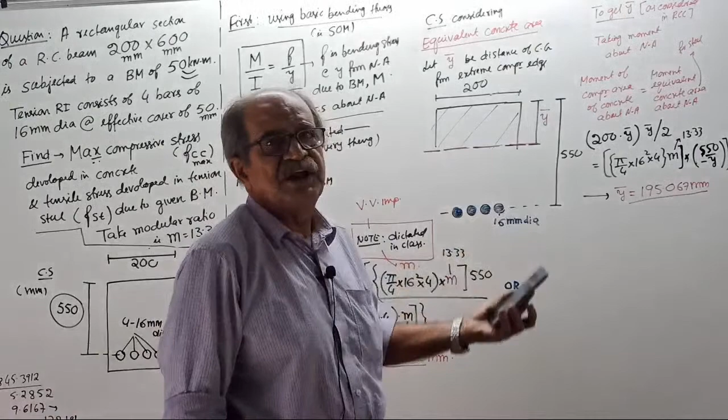But remember, this question is completely basic concept oriented. Once this question is over, I am again starting bending shear stress in a systematic way, where this RCC will not come. Therefore, today also, right now one small problem.

Somebody is digging a bore well there, but actually far off place, no problem. Once in a while that sound will come, discharging sound, that's okay. But if it rains suddenly, and if any problem comes, I will not write on the board, shout like that. I will bring it to a stage and stop.

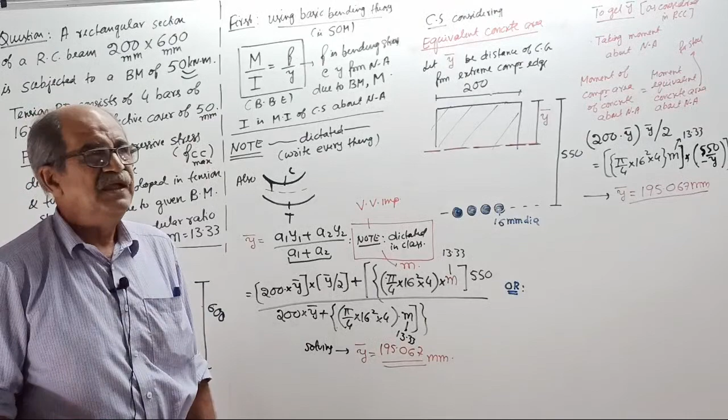Okay, now what they want in the question is, when this bending takes place here, due to this bending, see, due to this bending, upper side is going to get compression, lower side is in tension.

Concrete at the topmost fiber, because of sagging, will get maximum compressive stress. That symbol I will put, FCC maximum - stress in concrete in compression maximum. I read somewhere, I read once again.

Maybe last time I interchanged it. Stress, F stands for stress. I am not using sigma because in RCC working stress method, sigma stands for permissible stress. Okay, here today we don't know any property of concrete, no property of steel.

First of all, it is not known which steel is used, which concrete is used. Indirect hint is there - that you don't bother, it is a strength of materials question. Now, in strength of materials, bending for a member of composite section - remember, but unknowingly, RCC.

Find maximum compressive stress developed in concrete and tensile stress developed in tension steel. That is, stress in steel in tension due to given bending moment. Take modular ratio 13.33 - remember, regarding modular ratio, I told last time.

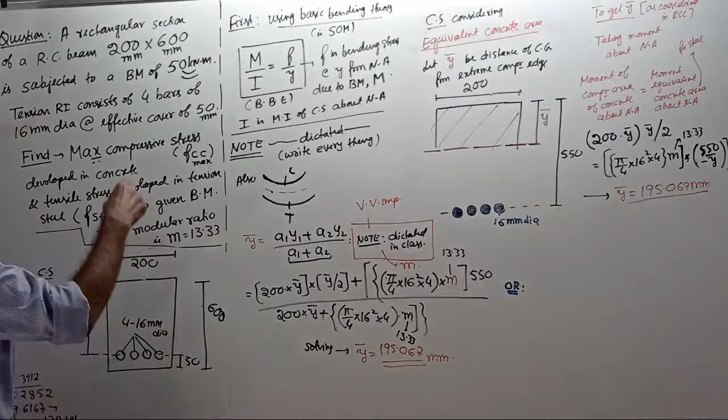I forgot that width is 200. Somebody can question: 4 of 16 if you place here, 80, 120 gone. 1, 2, 3, 4, 5. 120 by 5 is 20.

Around clearance of 25 mm comes in between. Okay, adjustment. Actually I forgot that. I would have taken only 3 bars. Width is 200. Later, today when I was writing the sketch, I realized in width of 200, 4 of 16 mm bar is difficult to place.

Okay, no problem, this is not an RCC class. If anybody questions that way, I will answer in the RCC class, or I will place it. Maybe it may not satisfy some requirement. No problem. Today we will find the stress and dismantle the beam.

And what will we do? We will dismantle this beam. We will completely take out this beam and break it. Okay, now they told effective cover 50 means from tension edge to center of steel, that is 50.

So from the extreme compression edge, top edge here, to center of steel is 600 minus 50, equals 550, which is not given. Instead it is calculated. You should know that. It is not given, it is a calculated value. I rounded it off. Over, start.

Now you forget about RCC. Come to basic bending theory. That is, you are in strength of materials. You do not know anything about RCC. Neither you know nor I know.

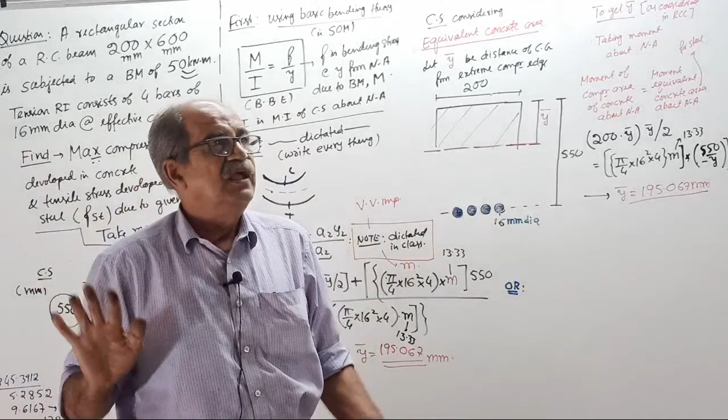Okay, I will do one thing now. From here, I will remove full RCC. One minute now. Before I remove it, I should tell one thing. You write here, in the question only, write:

Tension, concrete in tension zone is to be, what, tell me? You write in the question. What extra data or extra information is right there, please or kindly. Concrete in tension zone is to be, tell what? I forgot to write it here. It is to be neglected or ignored. Someone will say he has not told it, but I am telling here: you write in the question, ignore the concrete in tension zone. Over.

So where tension comes, we have only steel. Concrete is removed, it is not there. Right, now note, this is already told.

Now I want the cross section. Remember, those who want, write it. In strength of materials, I told you, when you write the cross section, see, upper side is in compression, lower side tension. Tension is taken only by steel. So if the neutral axis comes somewhere here, see, I have written here, you know neutral axis passes through CG of the cross section. So let y bar be distance of CG from extreme compression edge.

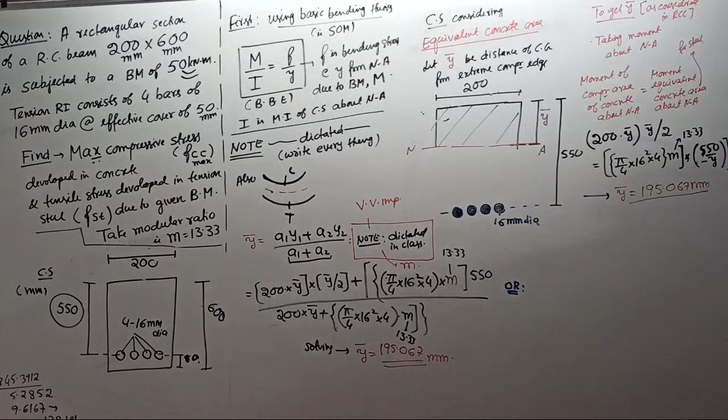Now below, complete empty, nothing is there. Oh sorry, I removed that axis only. Okay, neutral axis. And I'll change the red color pen for a little darker one. So that, okay, now okay.

Below, you have 4 steel bars of 16 mm diameter. Anybody talking about covers and all, keep quiet, I will tell. Someone told this way, okay. You imagine somebody told he is placing 4 of 16 in the width. Why should you bother? This is not RCC class.

Actually I should have given 3 bars, or some 3 of 20 mm diameter, or 2 of 25. By chance I put 4 now. I thought width is quite more. Then I thought I had taken around 230 or 300, but I took only 200. Okay, no problem, here nothing is there.

So below, from the top edge, at exactly 550 millimeter, we have 4 bars of 16 mm diameter. I wrote it in blue color, remember blue color is steel. Now this is the cross section, right here.

Cross section considering equivalent concrete area. This is really concrete, see, this is really concrete. This is not concrete, that is steel. Therefore you should not forget, what, tell me, should not forget.

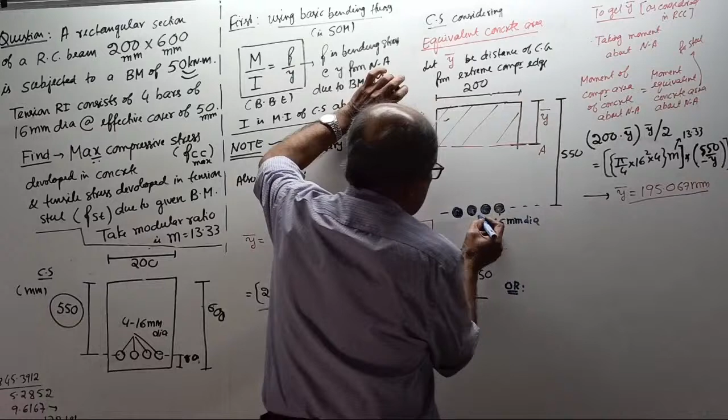Make a note, I write here, you should make a note: should not forget that this is to be converted to equivalent concrete area by multiplying the area by... I am removing it... by multiplying the area by, tell what?

To convert this steel into equivalent concrete, you have to multiply the area by modular ratio M. Write this down, I will explain everything to make it easy to understand.

See, in India we take rupees, America takes dollars. Imagine $1 equals 75 rupees. Suppose I have $2 and some 100 rupees, I cannot say the money is 102. What I will say is 100 rupees plus $2 multiplied by 75, that is the conversion factor. It becomes 150 rupees plus 100, so 250 rupees.

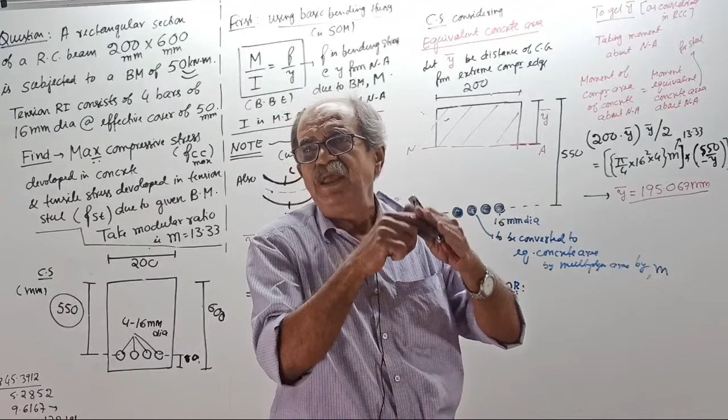250 rupees is the equivalent money in rupees. Or I can do it the other way: take $2 plus 100 rupees divided by 75, because I am converting rupee to dollar. Rupee being of lesser value, when converting rupee to dollar you have to divide.

See, steel is stronger, so multiply by M and it will change over to concrete, only in imagination. Steel will remain steel only. Nobody will actually go change the steel to concrete.

Now note down, write everything I tell here, including the dollar-rupee example. Now, when you take the cross section, on the compression side write concrete, on the tension side show steel, but with a warning: it is to be converted to equivalent concrete. Then only you can do the calculation. Now I want to locate the neutral axis.

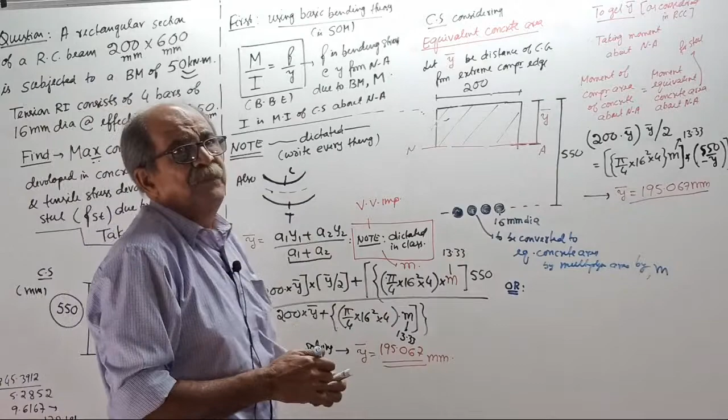In strength of materials or engineering mechanics, we take moment about the top edge, then the formula A1y1 plus A2y2 divided by total area. But remember, when you find y bar, the area of steel should be converted to equivalent concrete. Start: area of compression is 200 into y bar, with center of gravity from here at y bar by 2, plus pi by 4 of 16 square, one circle, into 4, for all 4 bar area.

This is the steel area, multiplied by modular ratio 13.33 to convert to concrete, with distance from CG to top edge being 550, divided by that area 200 into y bar plus this equivalent area pi by 4 16 square into 4 into m. Y bar comes out to 195.067 millimeter, which we got from the photo of last time. I noted this down to save time.

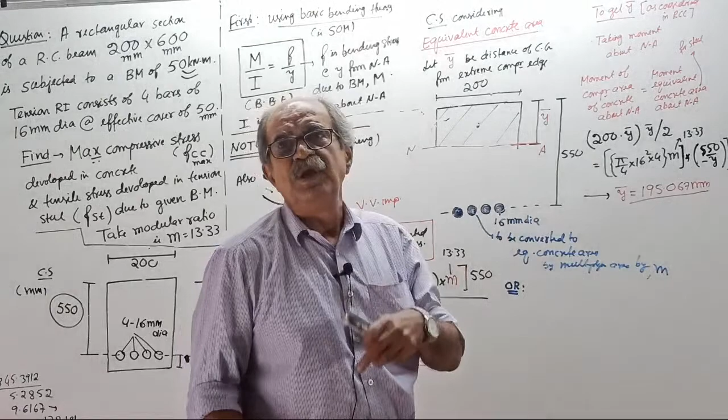This is the y bar you got. Now make a note: actually in RCC we don't find y bar that way. In RCC, instead of taking moment about a reference edge, we take moment about the neutral axis. Then moment of compression area about neutral axis equals moment of equivalent tension area about neutral axis. So 200 into y bar by 2 for compression area moment equals this area into modular ratio m into, from here to here, 550 minus y bar. Equate these and you get the same y bar.

Tell me, did we get the same answer last time? Yes or no? What I wrote here, is it all tallying? Yes, okay.

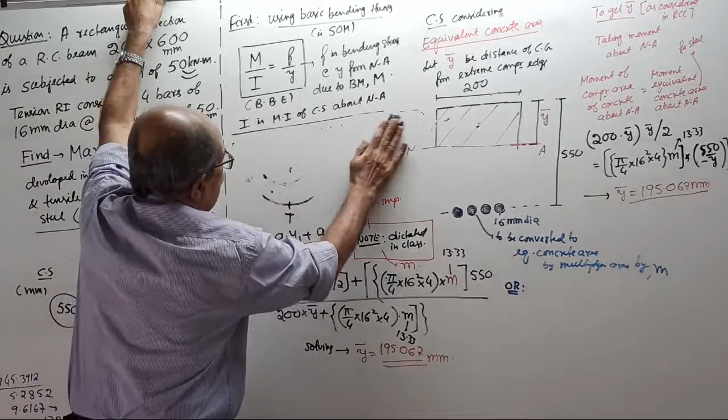Now that is clear. Now I will remove all these, I want space here. This will still remain, but I will remove this and just note compression at the top, tension at the bottom, because there's no space. I will remove A bar, A1 bar, A2 bar, etc., not required, the section will still be there. I should put a border line here, I should not go beyond this line, I will remember, a little to this side better, beyond this line.

Now, M by I equals F by Y. I will explain once again: F is the bending stress at Y from the neutral axis due to bending moment M. I is the moment of inertia of the cross section about the neutral axis. Therefore, now you require the moment of inertia of the cross section about the neutral axis.

This was where I wrote on the board where even I myself could not hear my voice. I tried for some time, my mouth was moving, then I decided to stop. Yes or no? Up to here was thoroughly told last time, then the class stopped.

Now, when you do moment of inertia, some ink spreading is there. Remember, we are solving based on equivalent concrete area. So in terms of equivalent concrete area, that is what we want.

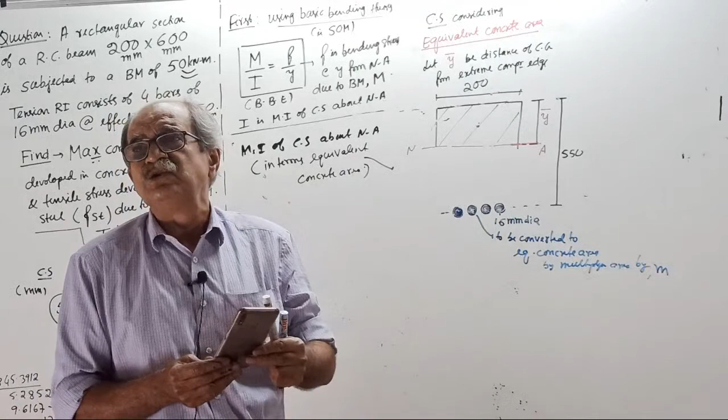So even for moment of inertia, the conversion factor is m. For steel, the conversion factor is m, the modular ratio. Because moment of inertia is area into distance square, and distance I am not changing, area into m time means... so m. I about neutral axis for equivalent concrete area equals...

See here, use the parallel axis theorem. One more thing, in this class I am not wasting time explaining parallel axis theorem.

People who study these things and want to gain more knowledge should at least know what parallel axis theorem is. If anybody tells me they don't know parallel axis theorem, I will ask why you are coming here. Without knowing parallel axis theorem there is no point. But I will not ask in class whether you really know the meaning of moment of inertia.

Newcomers will say yes sir, yes. Those who already know me will say we don't know, even though they know very much. Why do they say that? Because I will start telling something else then. I will say, look at a beam, I can see moment of inertia.

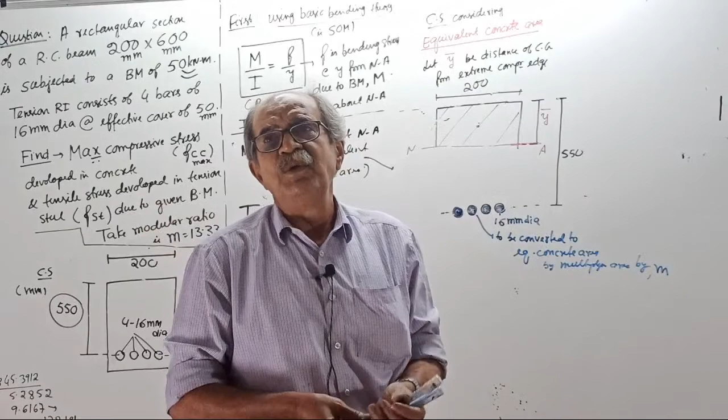Some people say we heard of it, they are very good actually, still they don't want to commit. Why? They know that if they say we know, the teacher will think about what to ask next time, therefore better escape by saying we don't know.

Leave it now. Newcomers will say we know. After 3-4 classes in colleges I have seen, first class you know everything, SFBM, yes sir. After 4 classes, SFBM, no sir. Why? Because that was before we knew you. Now we know what you are, so now we don't know.

Okay, start, I will briefly explain. I about any axis equals Ig plus A H square. That also I should not need to tell. Start. First, moment of inertia about its own centroidal axis.

That is 200, I will put blue color, into this Y bar, you enter now, 550, go that side. Why? Because I want to enter here. This is 550, Y bar equals, any answer, red color. There is red color, hello, it's Y bar. Oh luckily I noted it down.

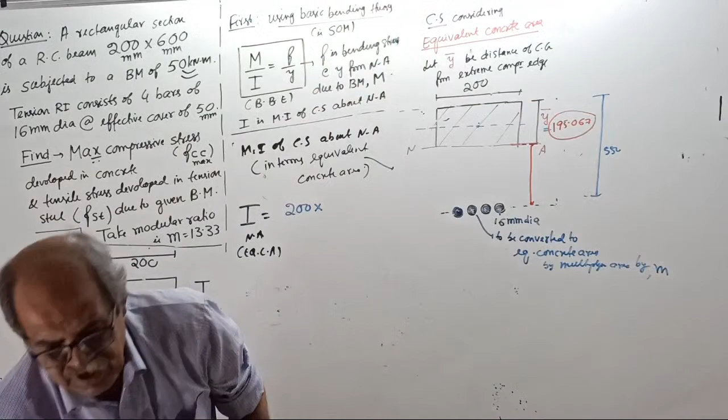These are entered values, not given, that will come. I won't ask you because it takes a lot of time. 550 minus 195.067 is 354.933 millimeter. Now, start.

I want moment of inertia about this neutral axis, that is, see this axis. Start, using parallel axis theorem. First, I about its own centroidal axis parallel to neutral axis. 200 into this distance, okay suddenly black color, no problem, 195.067 cube divided by 12.

I think I should remove all this. This is Ig, this is Ig. Then plus area. What is the area? 200 into 195.067 is the area, into from CG of this one to neutral axis, this distance square, 195.067 divided by 2, whole square.

BB is asking me why you are coming into the tension zone, I am rubbing it out. This is for concrete. Or if you know a little more principle, moment of inertia of a rectangle about the base is directly BD cube by 3. If you know it you can use it, but I don't use it.

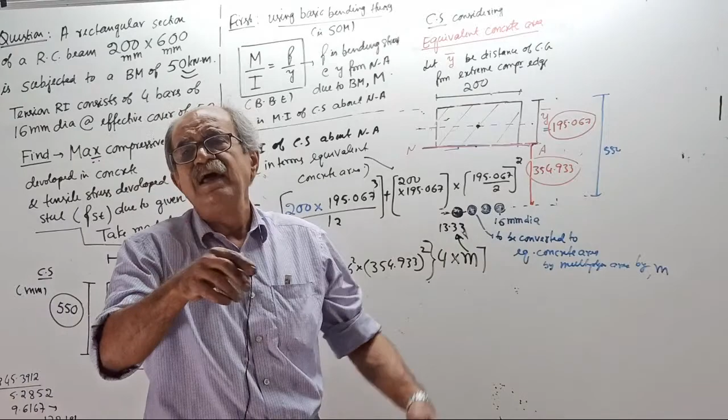But actually, when you calculate this number, you can skip it. Why? Because you can take I equal to directly area into distance square, provided dispersion is too much more, and self moment of inertia is too small. If this comes in crores, say 1 crore, 2 crore, 3 crore rupees, then this self moment of inertia may be just 20 rupees, 30 rupees. People will tell, leave it.

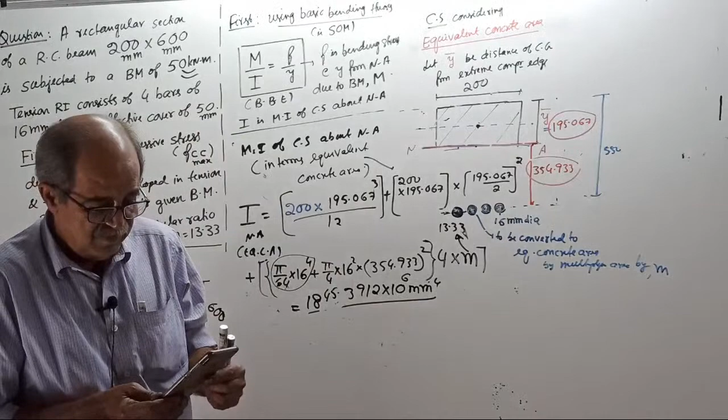Last time I gave the answer 1845.3912. Someone told it's not tallying. Later, someone told it's tallying, then the other also agreed. Yes or no? This was told last time. Correct now? Just tell the answer. Was it correct? I noted down somewhere here. It is 1845, not... tell me, correct or not? No, I want confirmation. Is the same answer given last time? I wrote somewhere: 1845.3912. Yes, okay. Now, start.

I over. Now see, I'll remove all this one now. I'll come here, this 550 I will remove, and I will draw the stress distribution diagram. Remember, sagging bending: if I continue neutral axis with red color, if I continue the neutral axis here, see correctly. If I draw the stress distribution diagram across the cross section, upper side compression, lower side tension. This is maximum compressive stress in concrete.

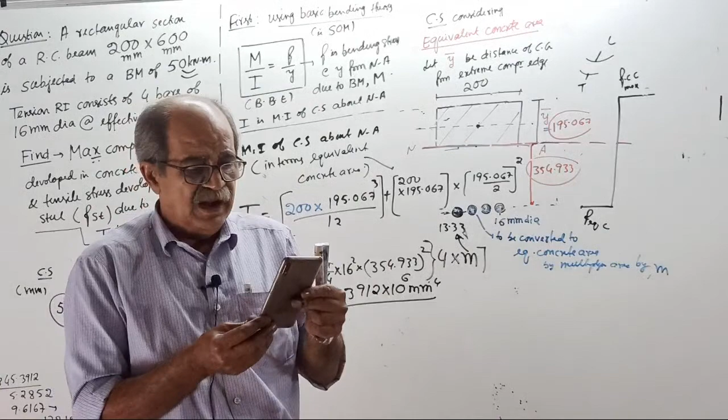I wrote what? Maximum stress in compression in concrete. Here, this is stress in what? Equivalent concrete. Stress for equivalent concrete in what? Tell me, in what? Not in compression, in what? First of all, imagination. Stress for equivalent concrete in what material? Stress for equivalent concrete in tension. This is not steel stress because this steel is already converted to concrete.

So then joined by a straight line. That is what theory? Compression tension. Okay, now start, now very easily you get the answer. All these I can remove, because we are about to close the question now. Not much, 184, I'll forget now. Okay.

You don't know how. See, this clearly shows what memory power I have got. I am very weak in byhearting things. Okay, start now.

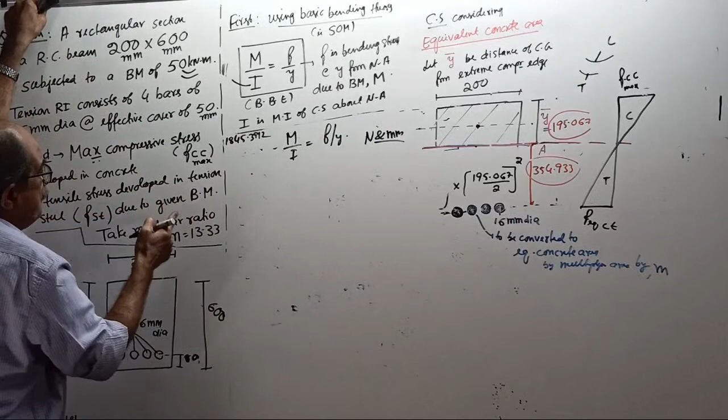Now, come back once again. M by I equal to F by Y. Start. First, M. Where is M? M: substitute everything in Newtons and millimeters. Start. Bending moment M is told 50 kilonewton meter, equal to 50 into 10 to the power 6 in Newton millimeter. If this is not clear, better log out and leave the class right now.

Divide by I. I equal to what? I equal to, where is I like that? 1845.3912 into 10 to the power 6 equal to, see, M by I equal to F. Go to the topmost fiber. Maximum compressive stress in concrete divided by, tell me, corresponding Y. For that fiber, Y from neutral axis. How much answer? What is the Y for top fiber?

Y for top fiber, fast. Reply a little fast, don't waste time. Y for top fiber. This lag I should remove somehow. If the lag is removed, the answer comes quickly in Zoom class. 195.067.

195.067. Using this equation, see, first I write here now. First, okay, 1 minute now. First, F max CC. First, F max CC. Okay, then I will come to the other one. I'll change this pen. First, you go for F max CC.

Okay, start. Therefore you get maximum stress in concrete in compression. Answer: tell the answer in Newton per mm square. I want, for some reason, 4 decimal accuracy. Fast answer. I already noted down 5.2852. I got 5.2852.

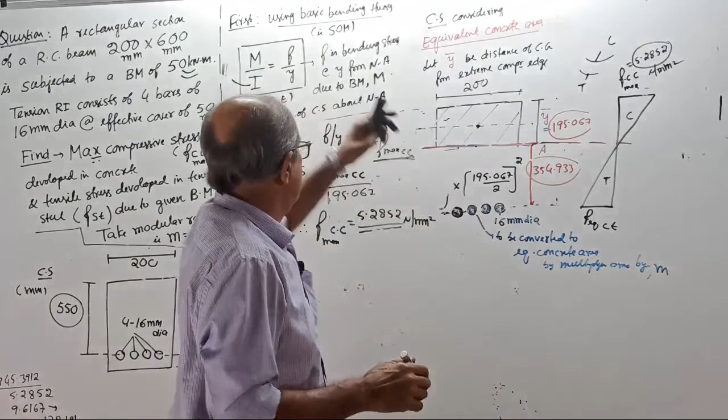Okay, over. Now find F stress for, what is the stress for equivalent concrete in tension? Same formula, M by I equal to F by Y. You write F-EQ-CT, then divide by, tell me, corresponding Y. Divide by corresponding Y, how much I have to write? Corresponding Y, what is corresponding Y? Corresponding Y, I am a little weak in mathematics.

354.933. Divided by 354.933, therefore you get stress for equivalent concrete area in tension. That is, at this level, if instead of steel it is concrete, what is the stress? How much answer? I got 9.6167. Is the answer correct? 9.6167 Newton per mm square is the answer. Is that answer correct?

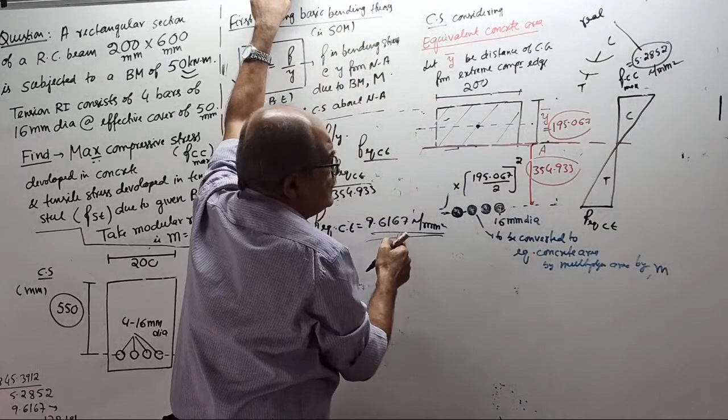Note this. This is stress for imaginary concrete. Actually...

Tension resisted by what? Tell me. Tension resisted by what? Actually, tension is resisted by steel.

Therefore, if this is the stress for imaginary concrete, will steel have more stress or lesser stress? Think a little.

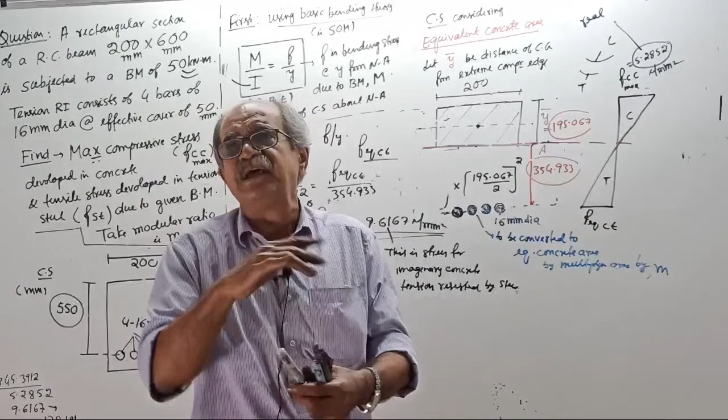I am not discussing this further because this class is an analysis for RCC, not for modular ratio in general. If I keep explaining that way, there will be no end—you study that in strength of materials. It will be more. So, what stress, tell me?

Therefore, tensile stress in tension steel actually equals whatever stress we got for equivalent concrete in tension, multiplied by modular ratio M, 13.33. Tell the answer. Why? Because if concrete is taking that much stress, concrete area is magnified area, and steel area is contracted. So for the magnified area, if stress equals...

9.6167, when you contract that area, stress will increase proportionally by M. Answer, I got...

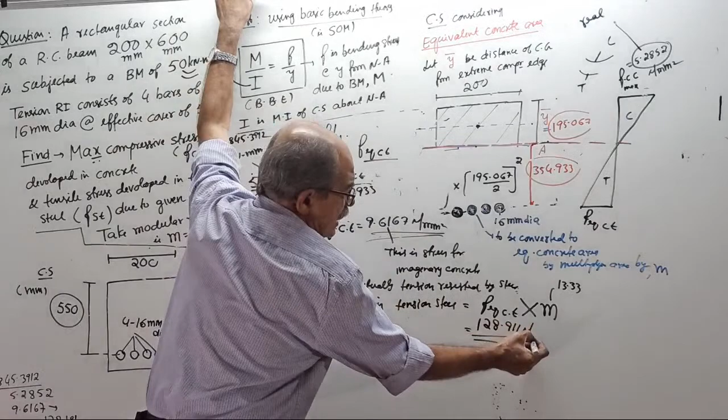128.911 Newton per mm square. Correct? 128.911 Newton per mm square. Correct answer?

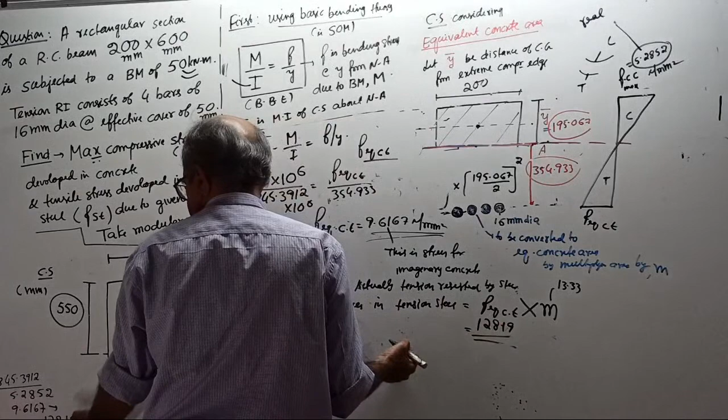1906 done. Now, one important note—I am leaving this, leaving strength of materials, with the final conclusion. See, I will remove this one now.

I want the answer now. See correctly, if you want, enter the answer. Don't enter here—why not? Because if you enter, it is imagination. Okay, leave it now. Now I will remove this one and write a note on the result.

Therefore, by basic bending equation or basic bending theory, that is M by I equal to F by Y, or sigma by Y—as per strength of materials concept, we got maximum compressive stress in concrete equal to how much?

9.6167 Newton per mm square, and we got tensile stress in steel—tensile stress in tension steel, no symbol—equal to 128.1906 Newton per mm square.

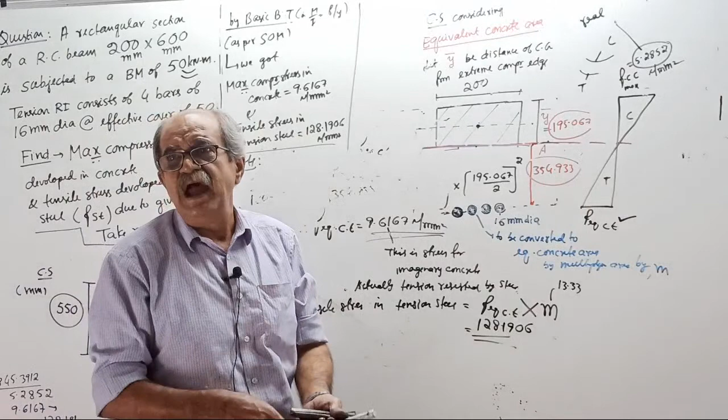Or you can write a note here. Those who are interested should write this note. My question comes now—I told people who want a brain teaser or brainstorming question, someone asked earlier. Now answer it.

See, here, is moment of inertia considered or not considered in this equation? My question is, moment of inertia is considered or not considered? I want the answer now. Moment of inertia is considered.

Right, I will ask my brain teaser a little later. Wait for the brain teaser answer. This all I will remove now.

Now the answer came, you remove it all now—none of them required. Actually, the question is solved, solved by strength of materials.

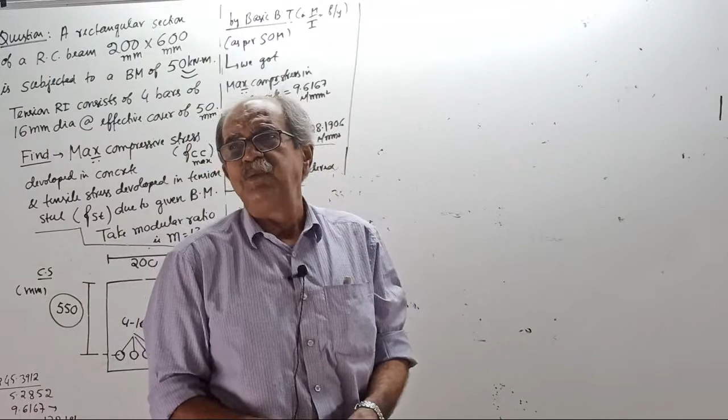Actually, nowhere in this world, I am sure, have I seen people solve RCC bending or stress problems this way. Remember, nowhere I have seen it. Nobody in the world goes for moment of inertia calculation or puts M by I equal to F by Y etc. No—because in RCC, they derive some other equation.

Use that one instead. There, is moment of inertia considered or not considered? Tell the answer. If you use R, now do one thing—close strength of materials, moment of inertia considered there. Okay, go to RCC, I will tell the equation.

Bx square by 2 equals—I am not by-hearting, I can see it there—Bx square by 2 equal to M times AST into d minus x. Equation for neutral axis: M into FCC divided by FST equal to x divided by d minus x. Relation between stresses. Then M equal to b into x into fc by 2 into d minus x by 3, or AST FST into d minus x by 3. None of them by heart.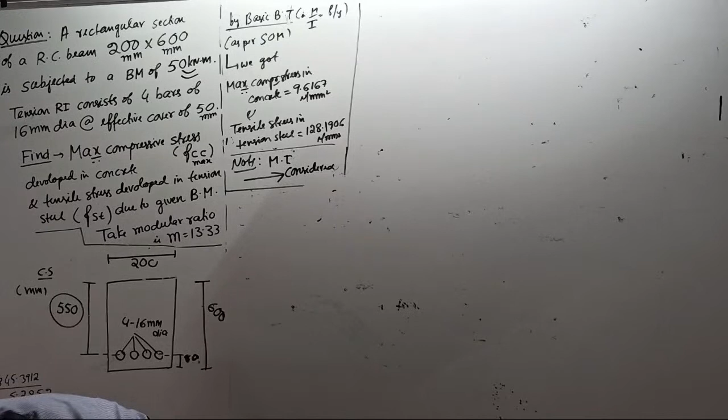I can see everything. Some will say otherwise. There, have you anywhere seen the moment of inertia term there? Tell me. Have you anywhere seen the moment of inertia term in the basic RCC equation? Tell fast—have you anywhere seen moment of inertia term in the basic RCC bending equation?

Fast, I told all the equation now. I will write it also. See, you are not answering.

You know RCC. Have you anywhere seen, did you see anywhere a moment of inertia term there? No? Okay, my question comes at the end of the class.

For all those who want brain teasers, remember, once I start giving brain teasers in the YouTube class, see how many will follow, one after another. Someone, I don't want to tell whom, he told me, sir, time being enough, sir. At present I am not able to digest. Please give some gap. This way of non-stop firing of questions, he told, I am getting completely blown away.

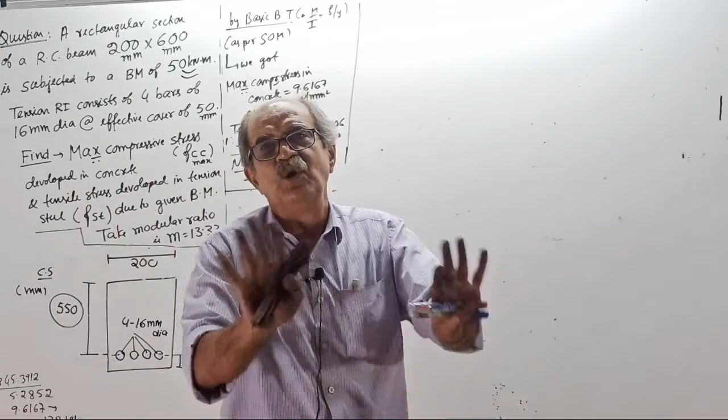He only asked me to ask some questions. I started asking, 3, 4, 5. Answers came, I told wrong. Then I asked, shall I ask the next question? He told, no, let me first try this one, then only I will ask you. So far I never got any message from them. Stopped permanently. Okay, maybe he thought I am not worth it. Reason why, still struggling to give the answer. I don't want to tell, someone good concept was there.

Okay, now start, now come to RCC. See, in RCC what you do is, I will tell briefly about RCC. First of all, my duty is not RCC, I can only give the equation and solve. But still some will tell, oh this person does not know RCC, so he by-hearted and came. So I don't have to prove anything to anybody. I will do one thing.

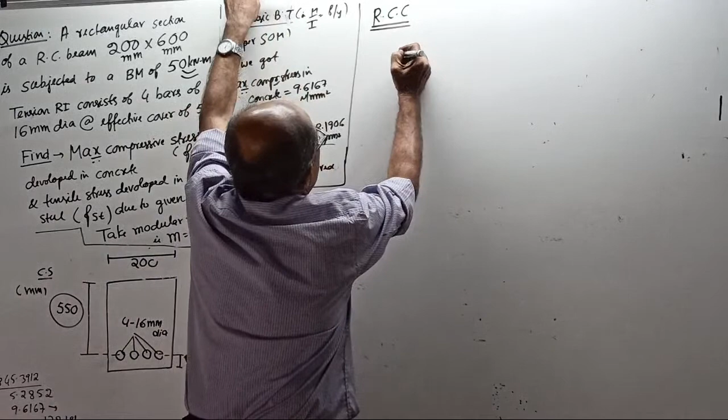Consider a rectangular section of an RC beam. Perfect concept, see width is B. This is the area of steel together, AST, steel. Somewhere here is the neutral axis.

Distance, in SOM you call it Y bar, in RCC we call it X. In working stress method, remember I told you, in limit state method we call it XU. Yes or no? Limit state method we call XU. Yes or no? Heard of it? Working stress X, limit state XU. No answer? At least heard of it or not? One yes, okay, leave it now.

Start. Now, if that is X, this will be D minus X, because the extreme compression edge to the center of steel is called D. Some people will tell D is the distance from the top fiber. No, wrong. D is the distance from the top extreme edge to here if it is a sagging beam, or from bottom to there if it is hogging, or generally you should say it is the distance of the CG of tension steel from the extreme compression edge.

Now this area is in compression, this is the area in tension, this is completely ignored. So if you draw the stress distribution diagram, see, symbol, here I will put maximum stress in concrete, FC, sufficient. Why? Sufficient, I usually use FC. That FC is nothing but your, what? I use the symbol here, what? F maximum CC, not required, simply FC.

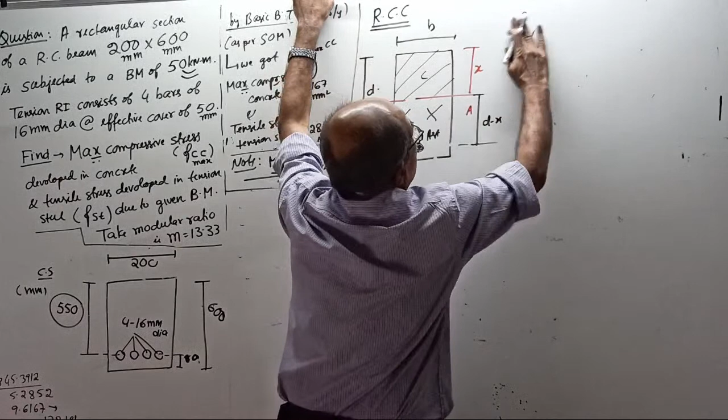Here, FC. Here, stress in steel is FST. So FC is maximum, I'll write here now. FC is maximum compressive stress in concrete. And FST is stress, okay, stress in steel in tension. Now, this is for concrete, this is for steel. No.

Now you cannot use any linear function. What do you have to do? If this is concrete, this also should be converted to equivalent concrete. Stress in steel, we want to change over to concrete. Tell me, if the steel is taking FST stress, for imaginary concrete will it increase or decrease?

Ulta now, reverse. Earlier I told, you know stress in concrete, you multiply to get stress in steel. Now this is stress in steel, I want to get equivalent for concrete. Will it increase or decrease? This whole theory I told in the RCC class for you in the RCC batch. No answer. It will decrease.

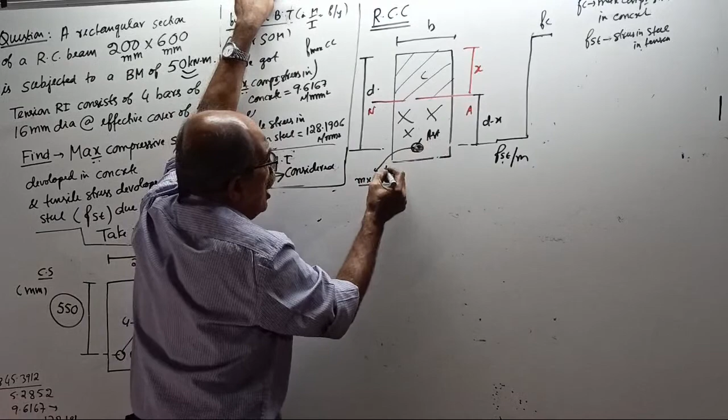So what do you have to do? You have to take FST by M. And this AST, when you change it, it will become M into AST. See, when you convert the steel to concrete, it becomes M into AST, and stress in steel, when you convert to concrete, divide by M.

In RCC, sometimes I tell our students blindly, do one thing: area conversion, multiply; stress conversion, divide. Sir, got it, sir. Why, see the nature of students, see their spirit. Area conversion, multiply, stress conversion, divide.

One small piece of information for you. Recently I am taking some classes, now I observed the level of understanding and basic knowledge has drastically gone down. Earlier it was something studied well, see 2010, 2011, 2012, etc., up to 2020 level. Now you don't know.

Suddenly now, the level is here. It has come down, drastically down. Can anybody tell the reason? They don't know anything. What is the reason?

I know the reason. Earlier, exam fear was there, so you had to study at least something. Now, recently, past 2 years, there's no exam fear. Everybody passes without writing examinations. That is because of COVID-19. That's why some people call it the COVID batch.

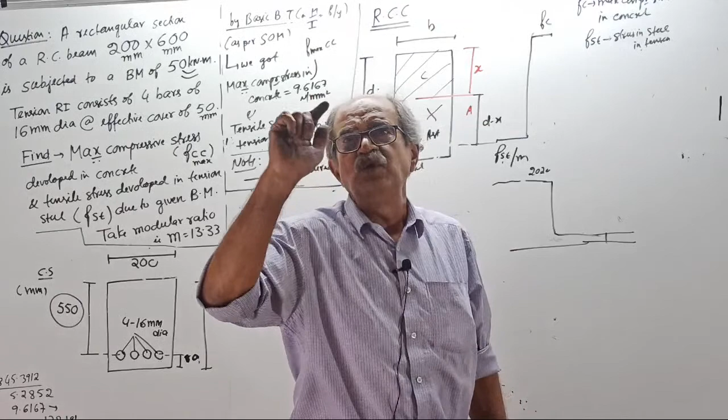I observed it in the subject knowledge. Even earlier there was a limit, I won't say the earlier level was very high. But at least what knowledge they used to have 2-3 years earlier, those who come to me now, 90% of that is removed. Only 10% is there. Very bad.

If you are in the teaching profession, you can make this out. Suppose you have taken a class for 5th semester, after 1st, 2nd, 3rd, 4th semester passed out. When you take 5th semester structural analysis, you will face such difficulty - they will ask, 'fixed beam, sir, what is that?' Earlier they would at least tell WL square by 12, WAB square by L square, or at least tell bending moment. Now they ask, 'bending moment, what is that, sir?' You see how much the standard has gone down.

Okay, leave it now. Now, FST. And as usual, M is modular ratio. Modular ratio, okay. Now, is everything okay?

Okay, I can see here only. Now see, therefore the stress variation is like this. I am telling this is compression and this is tension. Now I will take one by one and solve. First, I want to locate the neutral axis.

Now coming to this question, our example question here - as a RCC problem, tell me the answer for all dimensions. B equal to 200 millimeter, correct? And we got effective depth D equal to 550 millimeter. And area of steel in tension, AST equal to pi by 4 of 16 square multiplied by 4, equal to 804.25 mm square.

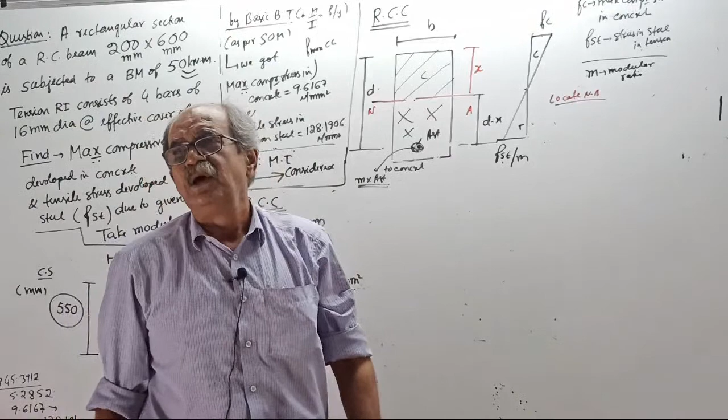Some will say, sir, is this by heart? No. 4 of 16 mm diameter bar, I've used it more than 4,000 times, I know the area. 4 of 20 mm is 1256.64. 5 of 20 is 1570.8. Why? Because when you use it many times, even if you don't want to, the answer comes automatically. 3 of 20 is 942.48. Okay, leave it now, that's enough of that.

Right, AST. And in the question they told M equal to 13.33. Now, as I derive, I will solve.

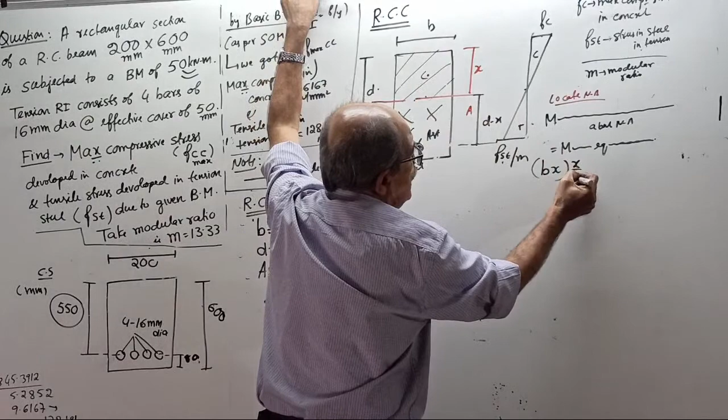To locate the neutral axis, you write moment of compression area about neutral axis equal to moment of equivalent concrete area for the steel bars about neutral axis, or moment of this area equal to moment of that area about neutral axis, with the steel converted to concrete. You get B into X is the area, and its center of gravity is at X by 2, equal to this area AST, but converted to equivalent concrete by multiplying M, and from here to here is D minus X. So you get the equation bx square by 2 equal to M times AST into D minus X, which is the equation to locate the neutral axis.

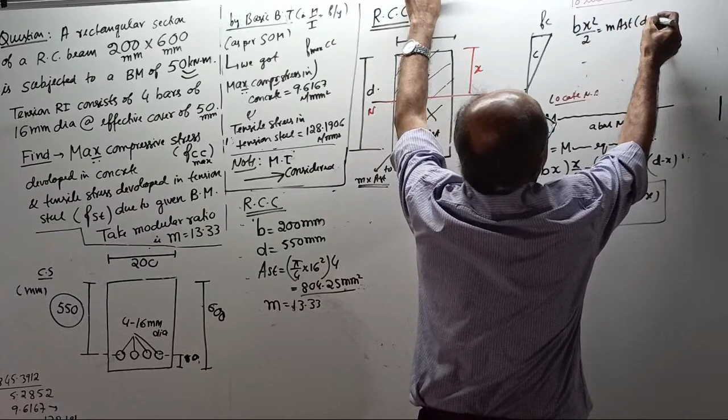Okay, I will write it somewhere so we can apply it later. I'll remove this now. Therefore, to locate the neutral axis, the equation to be used in RCC is: bx square by 2 equal to M times AST into D minus X. This is the equation for the neutral axis in RCC, which I covered in the RCC class for you.

Okay, now further - due to bending, maximum stress comes here in compression. So from similar triangles of the stress distribution diagram across the cross section for the equivalent concrete area, you can write FC divided by X.

Equal to FST by M, or I'll write it another way, easier: FC by FST by M equal to X divided by D minus X. Therefore, if you simplify, you get the relation between stress in concrete and stress in steel, given by M into FC divided by FST. FC is the stress, actually FST by M, with M jumped to the numerator, equal to X divided by D minus X. This is the equation.

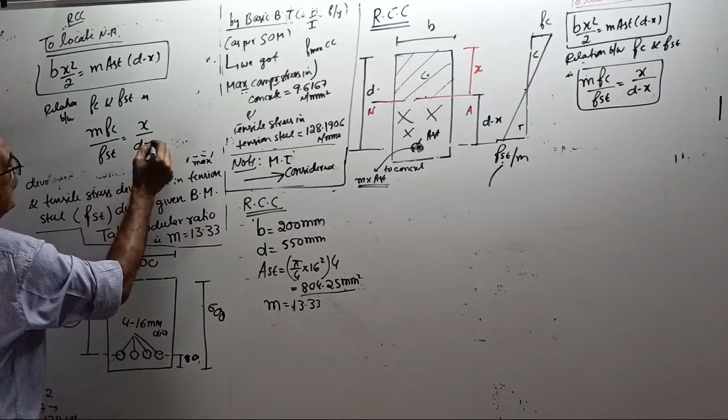Actually, I don't have to derive this, I can just give the equation. But I am deriving it for my brain teaser question, otherwise why should I derive it? Okay, now lastly, I will remove this one.

Now I want the expression for m. Okay, I will remove this one now.

Now this concrete area is in compression, so there is a compressive force like this. That force will be acting, force equal to stress into area. So as the stress varies, the force will vary too, and there will be a resultant force here called C. To the center of tension steel, there is a force equal to T.

This is lever arm A. Now C is the resultant compression force in concrete, in compression, and T is the tensile force in steel.

In general, resisting force equals stress into area if the stress is uniform. Whereas if the stress is not uniform, it is force equal to average stress into area. Heard of this one? Tell me, at least heard of this?

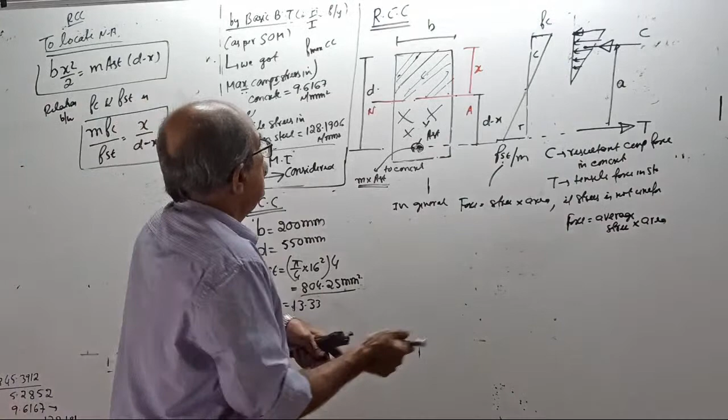Clear or not? Okay, now therefore your C equal to compression force. Area is B into X. Into stress: here stress is Fc, here 0, so (Fc plus 0) divided by 2. So your resultant compression force C equals Bx Fc by 2.

Now I want the tension force T. Tension force T equals area, which is m times Ast, the equivalent concrete, into Fst by m, which is the stress. The m will cancel, so T simply comes as the steel area into stress in steel. This you know thoroughly in RCC.

Now lever arm A is the distance between the lines of action of C and T. Since it's a triangle here, this will be acting at 1/3 of X. In limit state method, when the stress diagram comes this way, the average is 0.36 FCK, and the CG is at 0.42 XU. Remember it? The same principle applies there: average is not Fc by 2, it is 0.36 FCK, and CG is not 1/3, it is 0.42 XU.

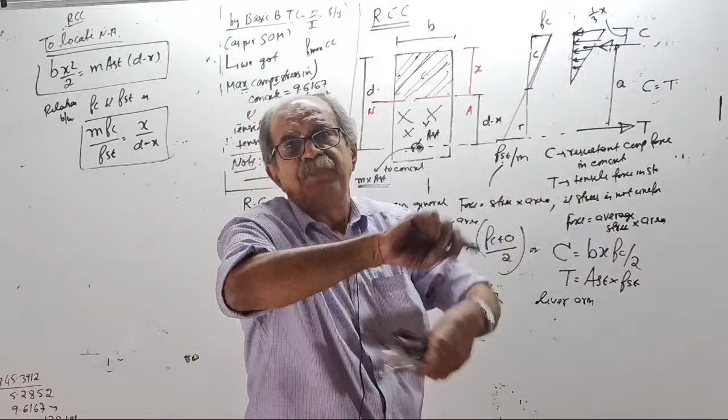Yes, therefore now for equilibrium, your C will be equal to T. Two equal unlike parallel forces separated by a distance will form a couple. The moment of the couple, called the internal resisting moment, will balance the external bending moment M. So your M will be equal to either C into A or T into A. Further I won't discuss because this is not an RCC class.

See now, one minute. People who keep telling bending moment is internal, do you know what they tell? People should wake up from this wrong concept. Some shout like anything that bending moment is internal. I pity them. See, people who shout bending moment is internal, do you know what they tell? They will tell, in an RCC beam problem, that the internal resisting moment will balance the external bending moment.

Or in the question they will say the beam cross section is subjected to a bending moment M. When the beam cross section is subjected to bending moment M, is it internal or external? Tell me. When you say it is subjected to a bending moment M, does that mean internal or external? That alone will tell you. If you tell me, they only give the RCC problem where the beam cross section is resisting a bending moment, or subjected to a bending moment of M. So what does M mean? Subjected to something means what -- internal or external?

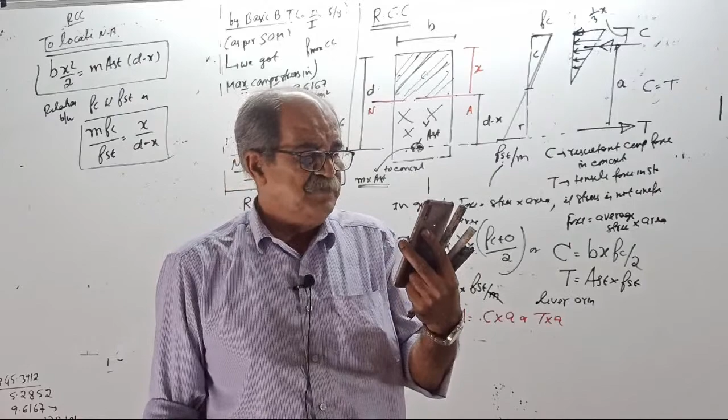Subjected to something means external. One class in YouTube with full shouting, I want to awaken everybody who tell wrong concepts. Not now, a little later. I will tell, at least from today, talk sense. I will tell later, not now. But I will tell them, see, not for hurting you. It's a fact, it's the truth. Now, therefore, I will remove everything now. None of them required now. See, this also not required, that also not required. I can remove everything now.

Okay, one minute, the section is still there. Now see, I'll write here. Therefore, if you write M equal to C into A, your M equal to C. Where is C? C is Bx FC by 2 into lever arm, I forgot to tell. Lever arm A equal to D minus X by 3. In limit state, it is D minus 0.42 XU. See, everywhere the principle is the same.

Okay, now, therefore, if I write M equal to C into A, the equation is Bx FC by 2 into D minus X by 3. Or, M equal to, M is the bending moment for the cross section, equal to Bx FC by 2 into D minus X by 3. Or your M is also equal to, if I write M equal to T into A, it is AST into FST into D minus X by 3. Right here. Or you can tell M equal to AST into FST into D minus X by 3. You can tell this is the expression for M based on compression. This is the expression for M based on tension.

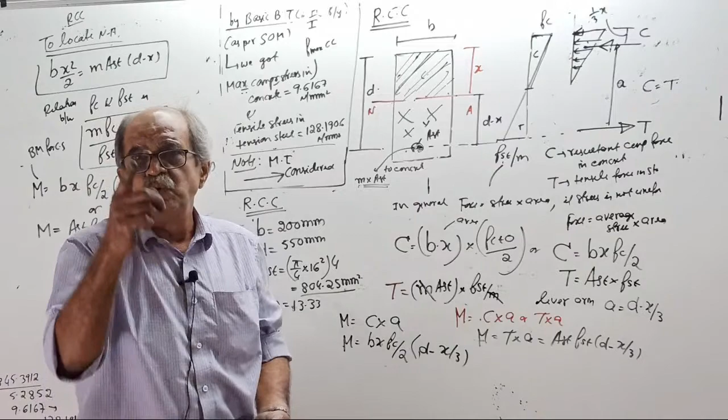Tell me, at least actually in our class, RC theory I need not derive. I should have directly told, see, you know that, even I also know that in RCC, the equation for neutral axis, Bx square by 2 equal to M AST into D minus X. Relation between them is M into FC divided by FST equal to X divided by D minus X. M equation is Bx into FC by 2 into D minus X by 3 or AST FST into D minus X by 3. But still, I proved it. Good for information, at least you should tell. Those who are not knowing earlier, they will tell. At least now you know it. Good, at least from me. If they understand that much, somewhat satisfaction for me.

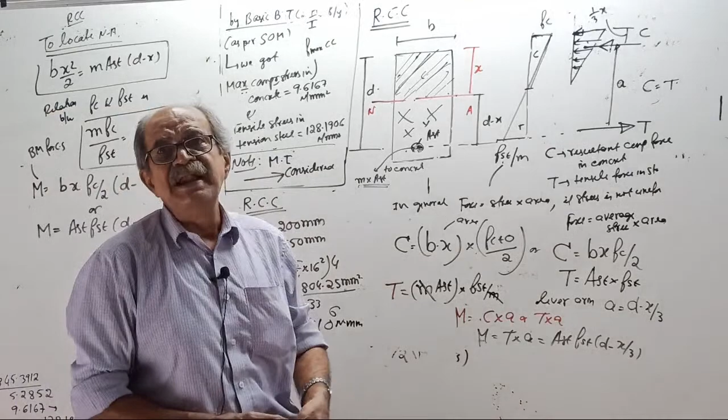Okay, now. M is over. Now tell me, for our question now, your bending moment M equal to 50 into 10 to the power 6 Newton millimeter. Okay, now tell me. Okay, see, now my brain teaser question comes now. Just now I derived the RC theory. Fast, answer it, all those people who want brain teaser. Now answer my question. See, I will tell my question here because some people want brain teasers. One person commented, where is the brain teaser? He does not know how many brain teasers will come.

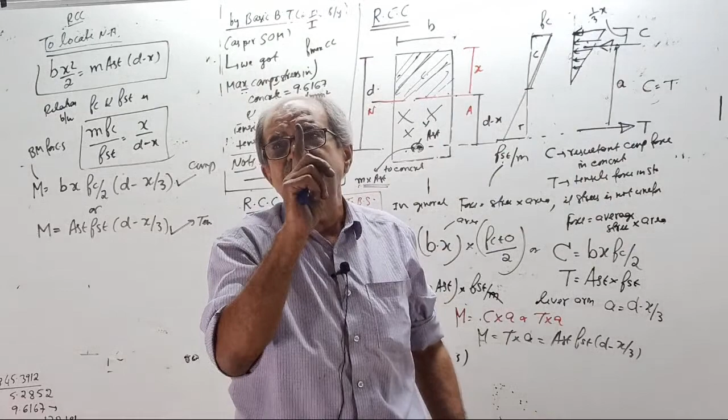See, I will write here. Those who are serious about brain teaser or brainstorming question, or what we call a tricky concept question, answer, see, tell it here. Earlier I used the moment of inertia concept, you know it. Now, at present, when I took Bx into x by 2 equal to this area, when I used similar triangles, or when I put C into A or T into A, tell me, did I use in one place moment of inertia? My question: in the RCC theory just now, that's why I derived it. That is why I derived it. In the RCC theory just now derived by me, did I use moment of inertia even once?

Tell me, even once, did I use moment of inertia? Fast, answer, even once, did I mention moment of inertia? You have to answer fast. No time. Did I use moment of inertia even once? In the RC theory, don't go to SOM. No, that means in strength of material, moment of inertia concept is used.

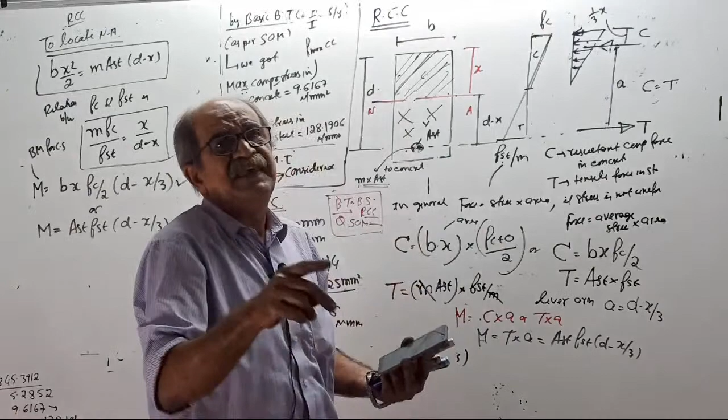Tell yes or no. In strength of material concept, or in strength of material's basic bending equation, moment of inertia concept is used. You have to tell yes or no first. In strength of material, that is the basic bending equation, moment of inertia concept is used, yes. But in RCC theory, for the working stress method, the popular version, moment of inertia principle concept is not used. Yes or no, is not used. See, show me where used. Is not used, tell yes or no. Is not used, you have to tell me yes or no.

Like what I am telling, in RCC theory just derived, moment of inertia principle or the term moment of inertia concept is not used. You are not answering the question. Am I telling correct or wrong? See, delaying means waste of time. Just now in RCC, yes, strength of materials used, you know it. RCC not used. Now my question to you.

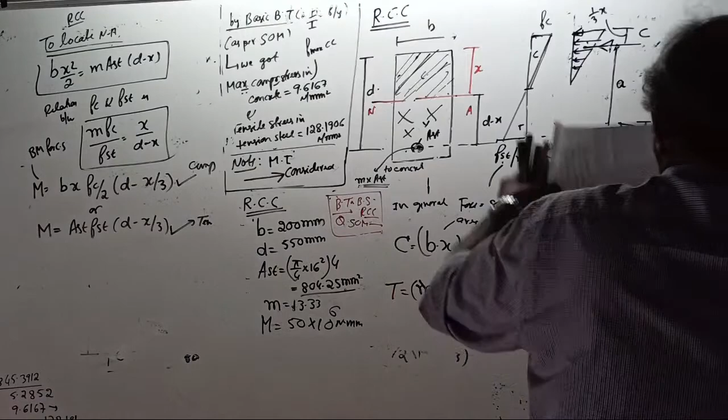Okay, leave it. Now it is for you to search. Use some magnifying glass and search it. Further magnify. Somewhere there, moment of inertia is there. That's all, my brain teaser question is over.

Now answer, show me. Those who are eager to answer, answer now, then only talk further or comment anything else. Why? Because someone asked me, sir, in the 100th class you said brain teasers are there - where are they? Yes, one came now. First you digest this one, then go to the other one.

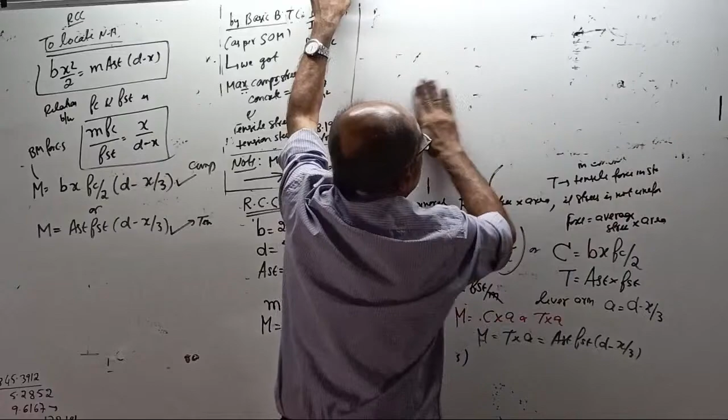Okay, now I will remove everything, and lastly, for 10 more minutes, I will solve the same question by RC theory. See now, fast - I hope the result will come same as what we got. Where is the answer? See, you know the result here. I sincerely hope the result will come same as what we got by the strength of materials concept.

Tell me, please wish me good luck. I need your good luck now. See, I am going for - instead of strength of materials concept, I am changing over to RCC concept, where to an ordinary person, moment of inertia is not visible.

It is visible, okay. Like happiness - not visible, but you can feel it. Hungry, you can feel. Happy, you can feel. Angry, you can feel - you cannot see it, but you can feel it. Here, moment of inertia - see, I will look here now.

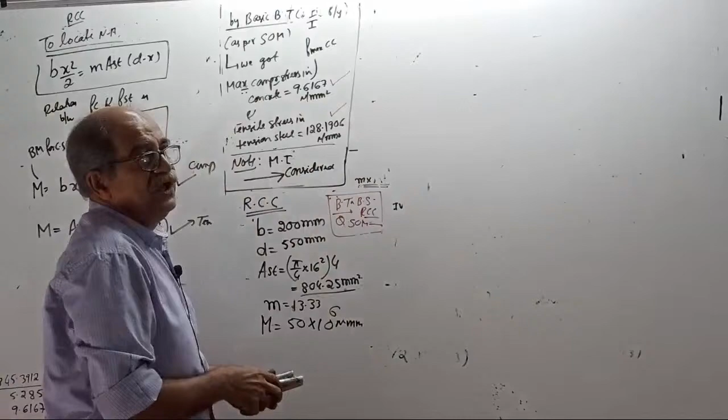Hope I will get the same answer. For that, from your side, I prefer if you wish me good luck. If you wish me good luck - see, if the answer is not tallying, my teaching profession is at stake. Reputation is at stake. Now, in case the answer is not tallying, my teaching reputation is at stake.

Can you wish me good luck? Can you wish me good luck? Or you can tell me, I don't need good luck wish. What do you feel? You can wish me good luck to encourage me. Or you can say, in Kannada, leave it sir, in Hindi, not needed, in English, it will come. Where will it go? Okay, shall I start?

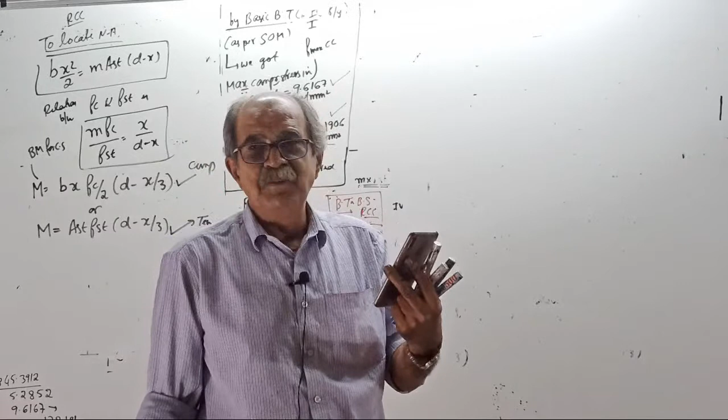See, nobody is wishing me good luck. I am taking a risk, putting my profession at stake. No good luck, nothing - or everybody wants me to fail this time. Is anybody hoping? We hope that this time he will go wrong so that we can laugh at him. Don't hope too much. Start.

Now start, first RCC theory. Hope that the answer will come. First locate the neutral axis. First equation: B x square by 2 equal to m times Ast into D minus x. B, 200 into x square by 2 equal to 13.33 into 804.25 into 550 minus x.

Solving, get x. This will tally because why? This is strength of materials only. This tallying is no advantage. So x will come as the answer. First, RCC theory, I got the x value.

Answer first, 195 point, how much? X value. 195, I still remember. 195 point, the number first, I forgot. See how much I remember. You are not answering, don't waste time now. 195 point, I somehow remember 195. I rubbed everything off - if you waste time this way, what can I do? 195.067, okay - 195.067 millimeter, I made it, 067 millimeter.

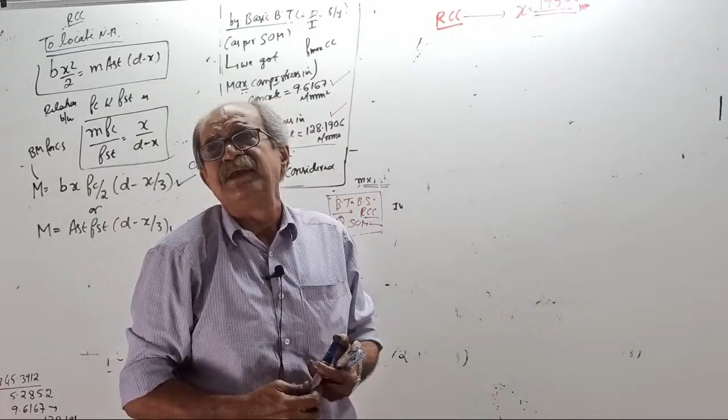Now important - now I want to find FC and FST. Stress in concrete compression, that is nothing but this number. And FST, that is nothing but this value due to M.

Okay, option 1. I will go for option 1. Use M equal to Bx Fc by 2 into D minus x by 3. Start, substitute M.

50 into 10 to the power 6 equal to 200 into x is 195 point. See, I am slowly getting tension now, my hand is trembling. Why? If the answer is not coming, I cannot continue class tomorrow. Hope that I will get the answer. Divide by 2. Some will say, sir, are you doing drama? What else is it? Any chance of the answer or not? D, 550 minus.

195.067 divided by 3. Please kindly save my life by giving the FC value same as what you got there. Fast answer, moment of inertia is there.

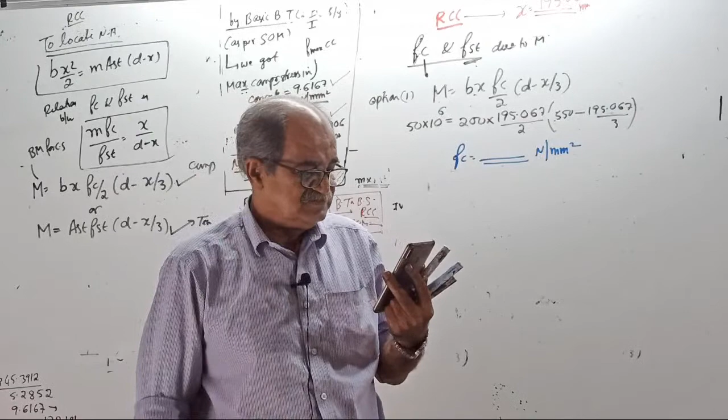Only possibility is a calculation mistake. In that case I will check again. See, if a calculation mistake is there, I will check once again. No problem, fast give the answer. Take everything. Oh, I have not written FC.

BX into what? Our important value is FC by 2, I forgot, right. FC by 2 into 550 minus 195.067 divided by 3. Fast tell me the FC value, and the strength of materials value we got is 9.6167. See, 9.615, 616, 617 will do.

You are not giving the answer. Same, how much are you getting? Same answer? Same answer, okay, therefore class will continue.

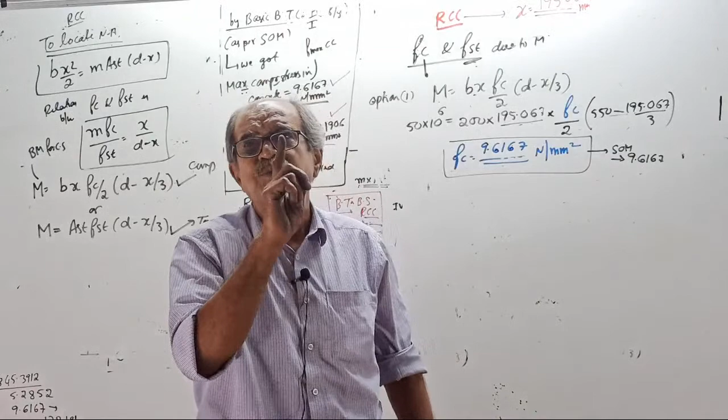9.6167. Someone, I won't say who, heard me talking this way in class and commented. He told me, if you talk this way, if you get stuck in class, you will have no face to show them, you will be royally insulted by them. He said this is dangerous, your way of talking and showing aggression, saying answer has to come this much otherwise I will not teach. They are dangerous, he told me. I told him, they are dangerous anywhere else, if I say I will come in 15 minutes that's dangerous, but it is not dangerous in structures, because in structures it has to come.

Okay, answer, FC over. Now use the equation M, FC by FST equal to x divided by d minus x, and get the FST. Start. M, 13.33 into FC, 9.6167 divided by FST equal to x.

Where is x? 195.067, x divided by d, 550 minus 195.067. Tell me the FST value, fast tell the answer. This is stress in concrete, this is stress in steel in Newton per mm square.

Tell the answer first, this is option 1, I will give you both the options.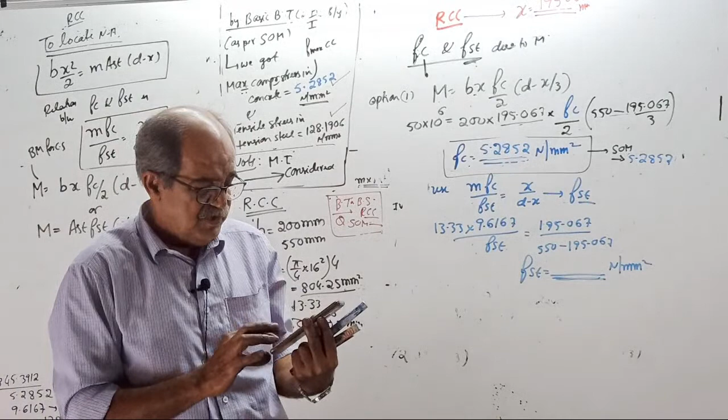First, is the answer tallying or not? I want to close the class now, just 3 minutes more. See, if you don't reply, it becomes difficult to continue. 9 point, 5.2852, is the answer correct or wrong? See, lastly, you are not responding.

Yes, okay, now substitute here. Tell FST. No, this will directly give stress in steel. There you get stress in concrete, convert to steel. In RCC, your equation is directly stress in steel.

Answer, tell the answer here, first. Sorry, not 9 point. See, 5.2852, print mistake. Answer, cross multiply and tell me FST.

Really calculate, don't tell me the same as last time, not same as last time. I will take care, I will stop the class.

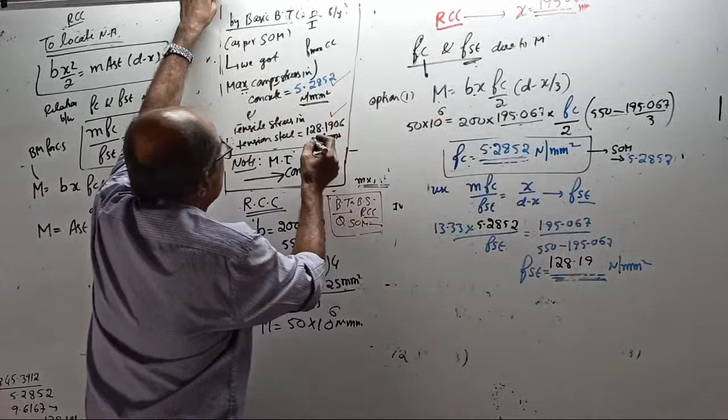128.19, thank you. 128.19, tell me how much answer we got by SOM. Tell the answer, strength of material answer.

128.19, rounding off error, that is okay. That is 100% result tallies with the strength of materials approach. Tell me, yes or no. 100%, not even one micro difference. Result tallies with what we got by strength of materials. Agreed or not agreed? 100% result tallies.

Now I will tell option 2. Option 2 is, first find FC using link, find FST. Option 2 is first find FST using link FC. You write M equal to option 2: AST into FST into d minus x by 3.

Okay, start. Substitute M: 50 times 10 to the power 6 equal to 804.25 into FST into 550 minus 195.067 divided by 3. You are first getting what? You will first get FST. I will calculate, don't worry. First steel will come. I will calculate, you don't calculate.

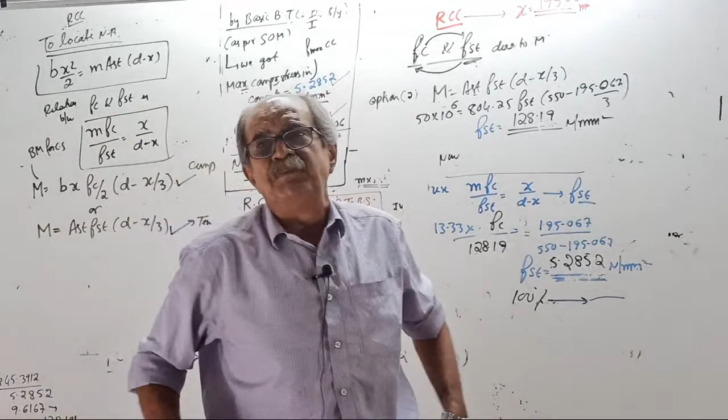5.2852 Newton per mm square. See, in the RCC class I told: use expression for M based on compression, get compressive stress, use the link and get tensile stress. Or use the expression for M based on tension, get the tensile stress, use the link and get the compressive stress. Or use expression for M, get the compressive stress, use the expression for M, once again use tensile stress.

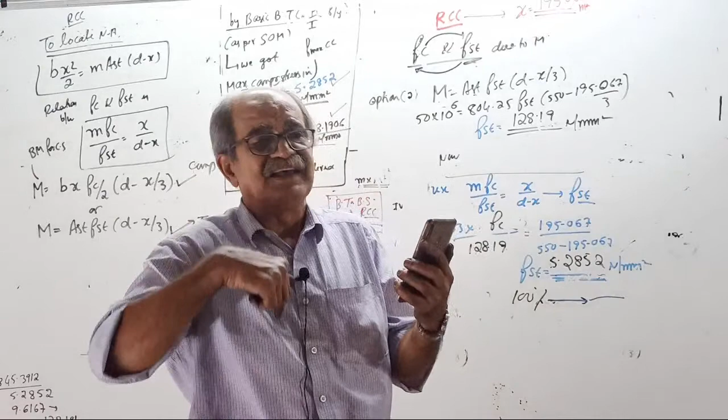You can do whatever you want. Therefore, tell me, basic bending theory and RCC theory, even though they look completely different, both are giving the same answer or not? Both are giving the same answer or not? At least in my class, other classes I don't know. Anybody's class, if properly taken and correctly told, it will tally. See, no response, it correctly tallies the answer.

Yes, now for the brain teaser tomorrow, if you want, tell me. I don't have to prepare, right now I can do it: how I derived the bending equation for RC beam, bx Fc by 2 into d minus x by 3, or Ast Fst into d minus x by 3. If you want, I can derive that equation using strength of material concept or using moment of inertia concept also. If I tell how to derive that one, then you will go nearer and nearer to searching for moment of inertia. Tell me, if you want, tomorrow I will tell, it will take half an hour.

If you want, I will tell. See, I derived what? Average stress, area, lever arm, none of them, directly the sum. RCC also uses M by I equal to F by y and derives the equation there also. It will come to the same equation. Then your search for that moment of inertia, you will be nearer, you get extra idea then. Tell me, if you want tomorrow, half an hour, I will do it.

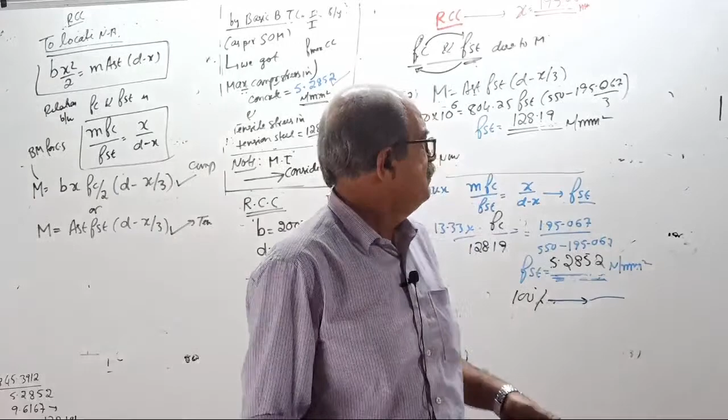So I am sacrificing my further class by doing all this, taking more and more class for basic knowledge. Somebody who wants to finish the subject fast, by this time he would have finished the subject and started a new batch. But no, I will give maximum information. Tomorrow, first half an hour, I will use the basic bending equation with the moment of inertia and prove the RC equation.

Then I will tell. Now if you look here, you can see moment of inertia compared to yesterday, nowhere visible. Now faintly visible, see, you will tell. Earlier, nowhere visible, now faintly visible. I know, it will be faint.

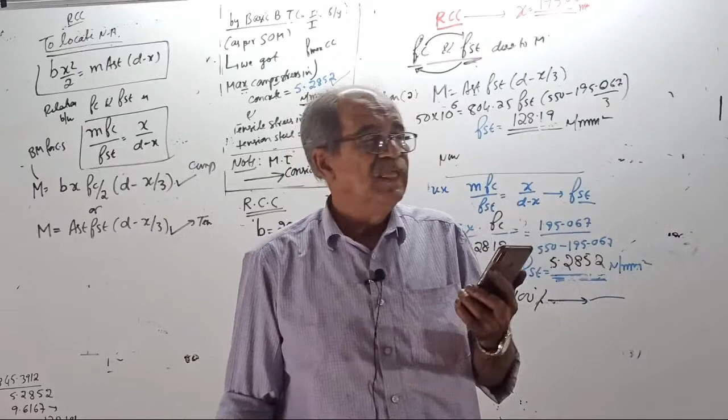Everything in one stretch, really useful for those who want to learn the concept. Really useful, at least some concept based. I don't know, you feel if it is not useful, tell me, I won't take such classes. Hope it is really useful, at least you will learn something more now compared to earlier.